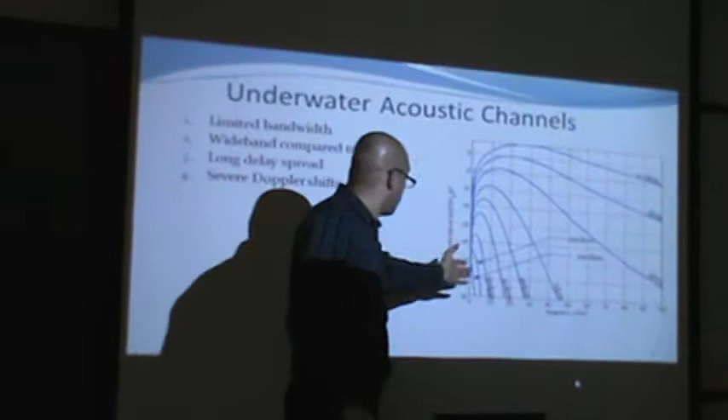It could be, say, more than 100 kilohertz if the distance is less than 1 kilometer, but then the usable bandwidth will shrink down to only a few kilohertz when we're looking at distances of 10 kilometers or more. This bandwidth, although very limited, when compared to the carrier frequency, is very wideband. What that means is that the properties of the channel at the lower frequencies could be quite different than what it is at the higher frequencies.

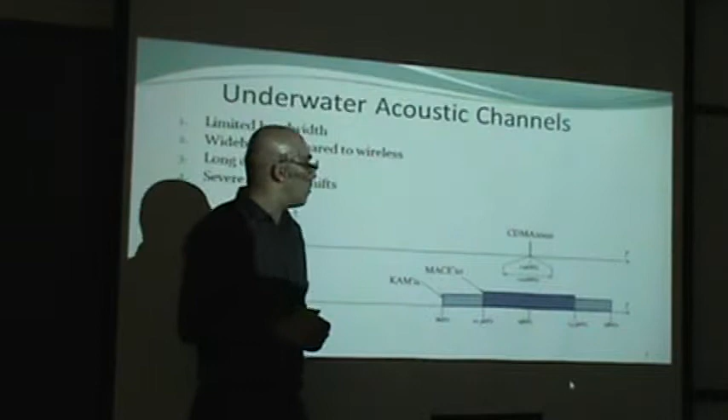This is in contrast to the wireless world where, for example, the 3G signal, although it has 1.25 megahertz of bandwidth, when compared to the carrier frequency, is a very narrowband signal. So we expect all of the channel to follow the same statistics.

Another property of acoustic channels is the long delay spread. As you see here, this is an ensemble of measured channel impulse responses from an experiment conducted in the ocean. This figure shows that the delay spread for this specific channel, which is typically a rather short one, spans more than 3 milliseconds.

That means if we want to be operating in single carrier mode, and say we're looking at symbol rates of 10 kilosymbols per second, we need an equalizer with 30 taps. Quite complex. Another thing that we see in this figure is that all these channel ensembles are measured during a duration of only 6 seconds. So this channel is very quickly varying, where in 6 seconds the channel has changed dramatically.

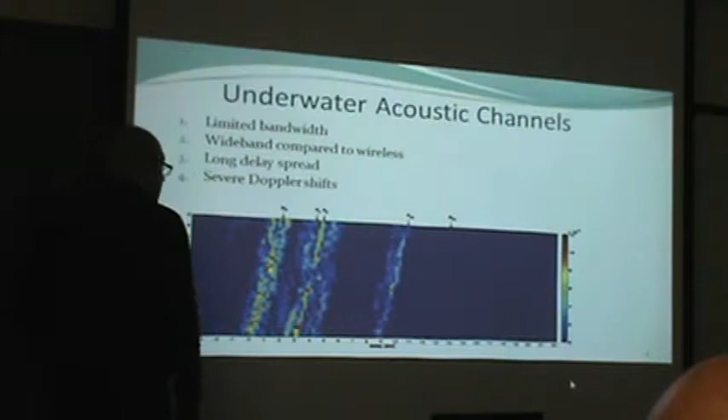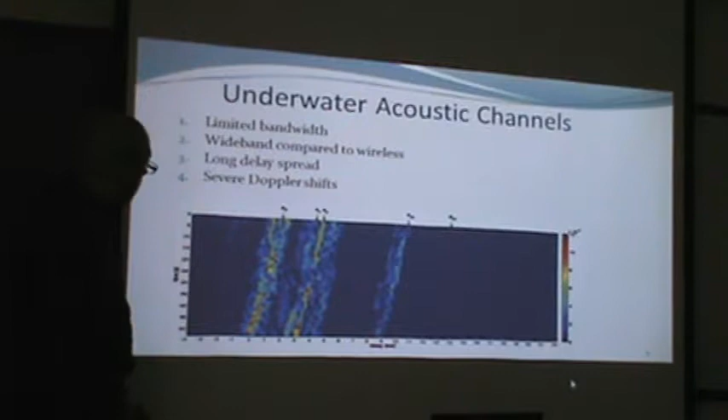If the channel is varying so quickly, it means we have severe Doppler shifts. This is a figure showing how this channel could vary both in amplitude and in phase. This is the channel impulse response as it varies over time. So both amplitude and phase of the channel taps do change.

That long delay spread that we just saw speaks strongly in favor of applying OFDM signals over this channel, because it would help us get rid of that long equalizer that was needed. However, OFDM signals in this channel have challenges other than the ones in the wireless world. In the wireless world, what we typically do is use one OFDM block to estimate the channel. Then that channel estimate is valid for the next few OFDM blocks.

This is not true for the underwater channel. The channel is going to vary so quickly that we need to estimate the channel for every OFDM block, or at least have some means of tracking the channel from one OFDM block to the next in decision-directed mode. That's a complicated job to do.

This is where perhaps another property of OFDM helps us out, which is, it makes differentially coherent detection feasible. If you wanted to do it in single carrier mode, having that long equalizer combined with differentially coherent detection is not going to work. Whereas with OFDM signals, we will see that it will work out pretty well.

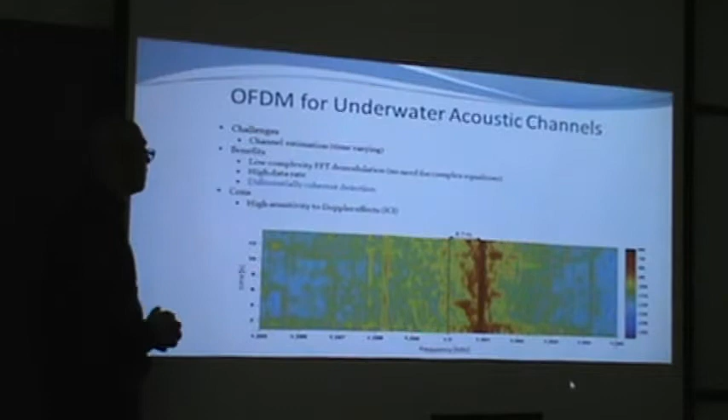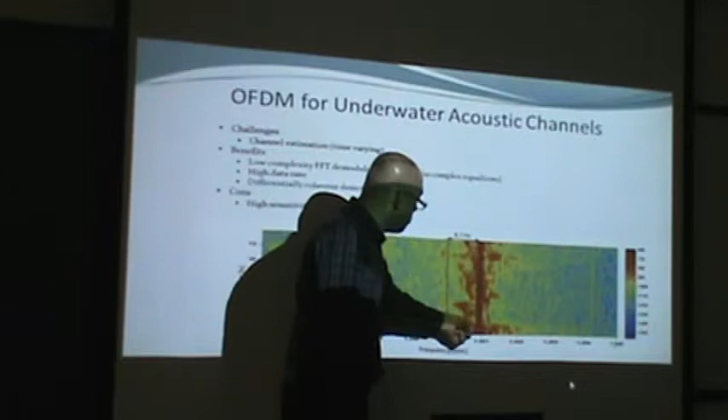By the way, the plot here shows the spectrum of the signal. When we transmit a 13 kilohertz tone, the received signal here shows an 8.7 hertz shift due to the motion, and you see some Doppler spread around that. So instead of receiving a tone at 13 kilohertz, we are receiving a tone with some spread due to motion.

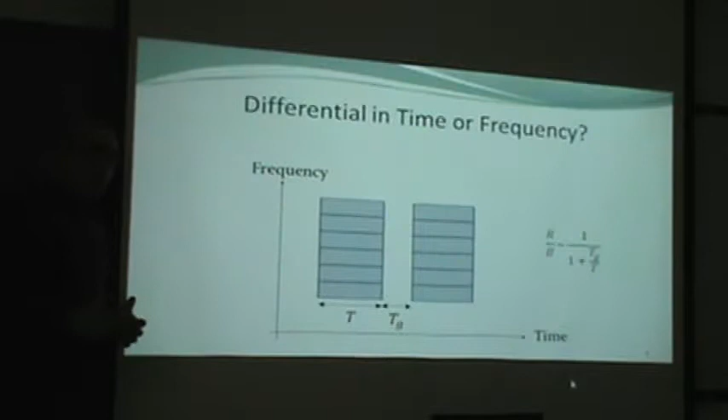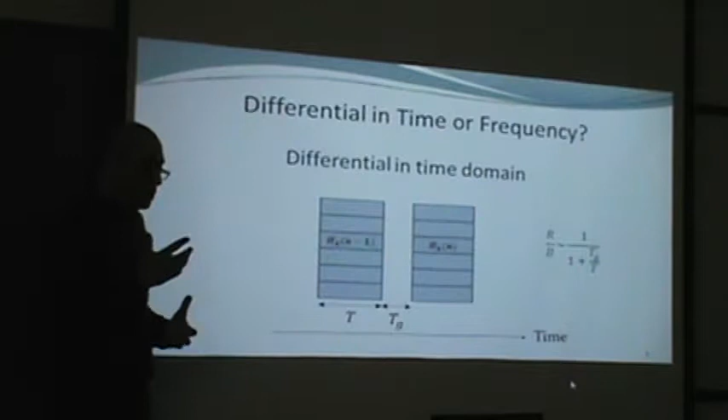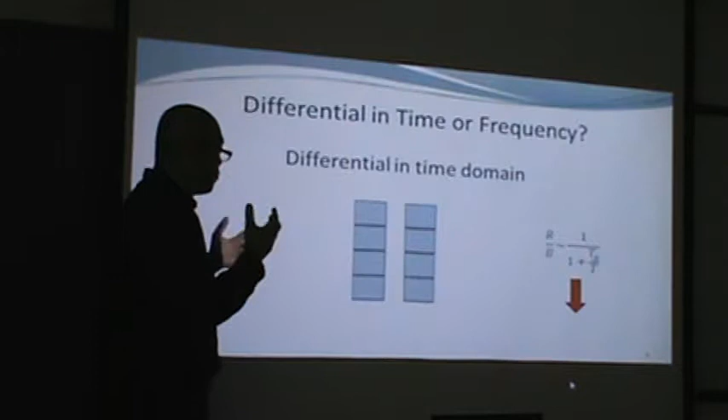If we want to do differentially coherent detection with OFDM, we have two choices. One is to do it in time domain. If you want to do so, we are going to be comparing two adjacent OFDM blocks. And if you want good performance, we need more coherence between two adjacent blocks, which means we would be looking to have shorter OFDM blocks. The problem? The guard interval. Because of that guard interval, shorter OFDM blocks means lower rates.

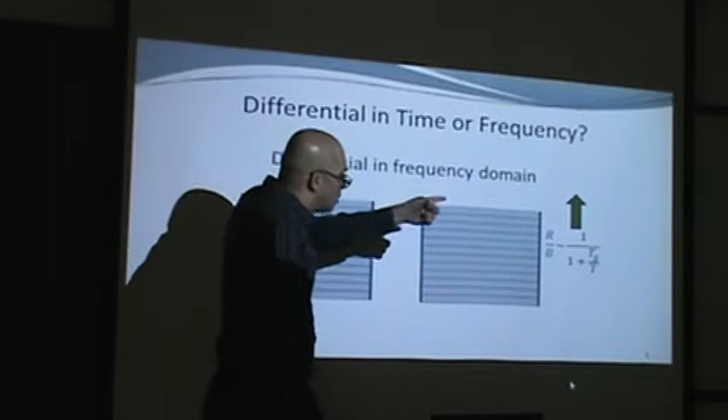Therefore, we look into another form, which is in frequency domain. In this case, we compare two adjacent carriers. To increase the coherence between them, we need to pack more carriers into the OFDM block, making the OFDM block longer. The rate will go up. Therefore, we do differentially coherent detection in frequency domain to pack as many carriers as possible into the OFDM block. But then the question arises on how many carriers can be fit into the OFDM block?

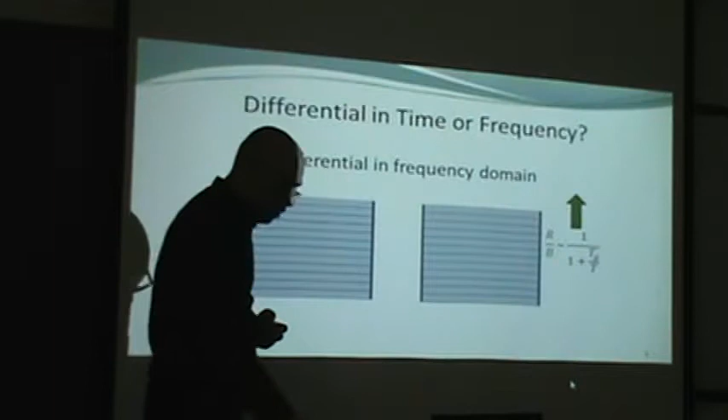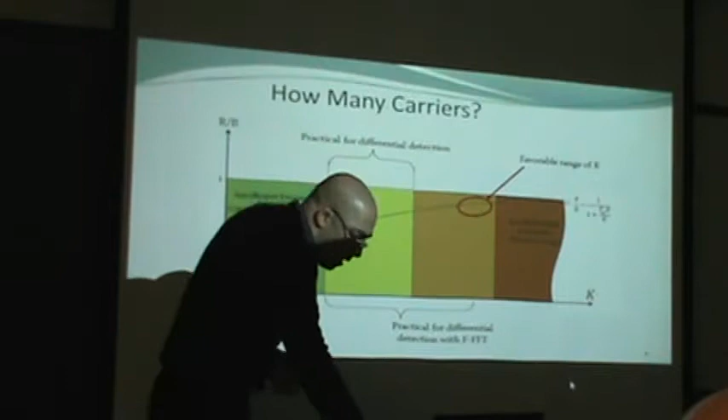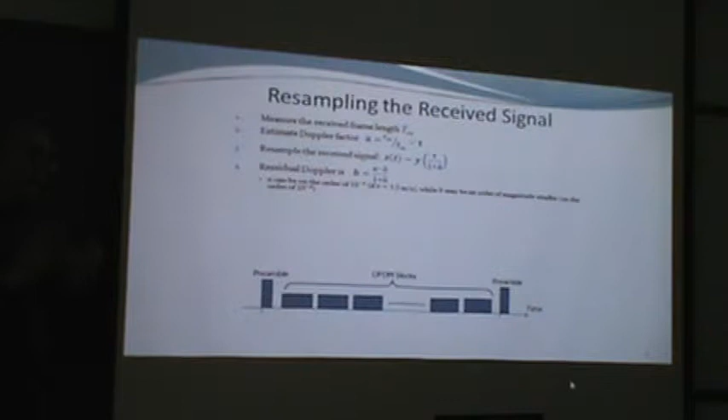But one of the methods that we use for compensating Doppler is similar to what they do in the wireless world, where they model the Doppler as a frequency offset and they treat it just like a frequency offset and remove it. However, in our case, the problem is a little bit different because the Doppler shift at lower frequency carriers could be quite different than the Doppler shift at the higher frequency carriers. Therefore, a better method of fighting it is to resample.

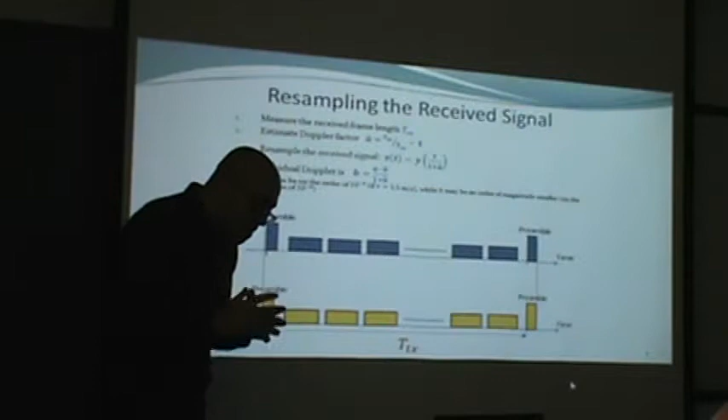To do so, we measure the length of the frame at the receiver using the preambles at the beginning and end of the frame of OFDM blocks. Then we compare that to the original transmitted frame length and we resample the signal so that the length matches that of the transmitted frame. What we observed in experimental results is that this resampling removes the bulk of the Doppler shift, but we will still have some residual Doppler, which will cause inter-carrier interference.

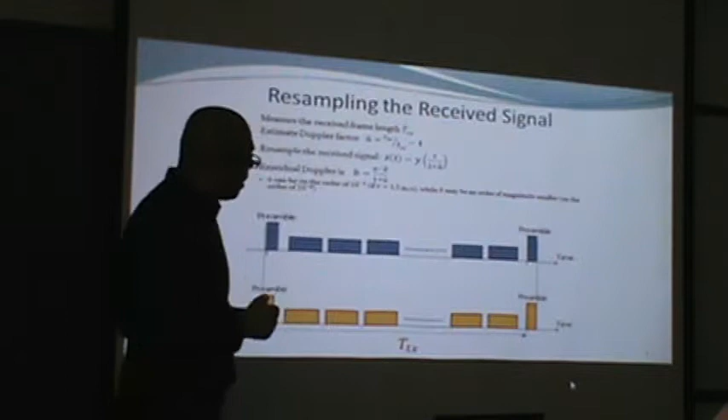But before I go on to how we deal with the residual Doppler, let me talk about differentially coherent detection. When we do that in frequency domain, we use the assumption that the channel does not vary between two adjacent carriers. If that assumption holds true, differentially coherent detection follows simply as division of the output of the FFT at two adjacent carriers. While that division works, perhaps a more interesting representation is multiplying by the conjugate of the neighbor, because now we have that factor of the channel coefficient amplitude sitting beside our symbol.

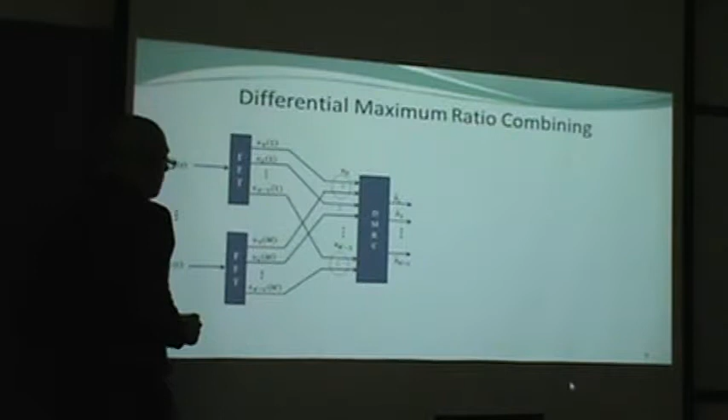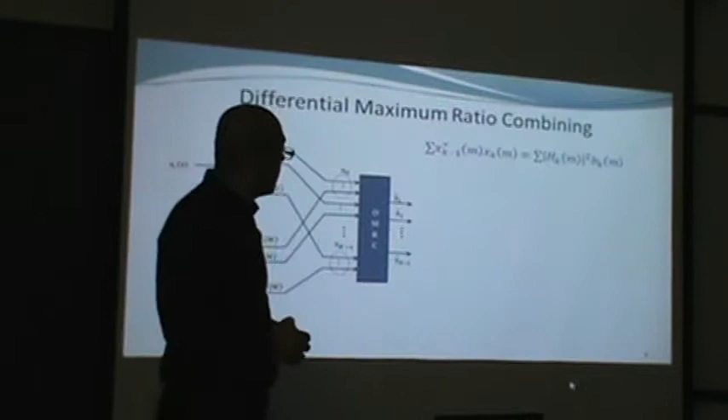This is very helpful when we want to think of an array of receivers. In this case, all we need to do is sum those variables up, and the result very much resembles maximum ratio combining. This could also be represented in vector form, where differentially coherent detection can be followed as easily as that.

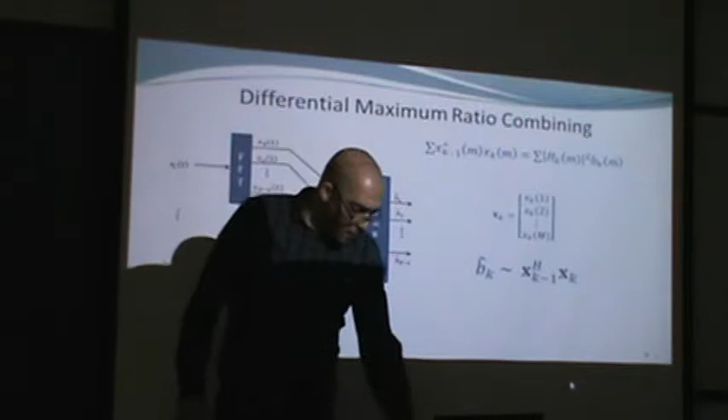But let us go back to the issue of the Doppler now. To deal with the residual Doppler, the most common approach that exists in the literature is equalization. Though I should remind you, this equalization is quite different than the one that we taught in the introduction. That was an equalizer with 30 taps, it was in time domain, it was very complex. This one, in most cases, you can get away with only 3 taps, and it operates over carriers.

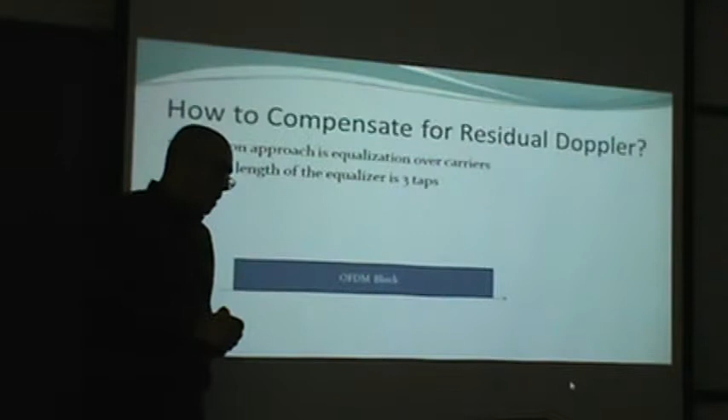So basically what it aims to do is to remove the ICI due to that residual Doppler that we could not resolve with resampling. The issue with it is the performance. When the Doppler shift is large, that equalizer is not sufficient.

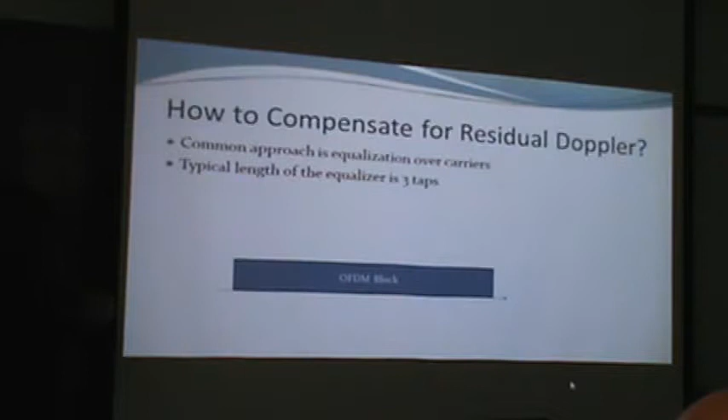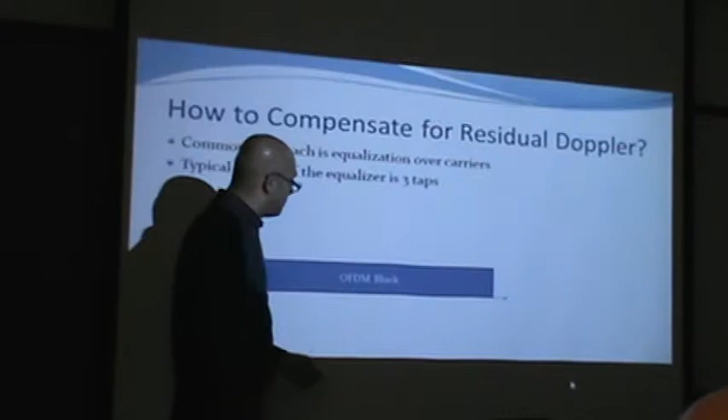What we do is based on a different vision on Doppler shift. One way to look at Doppler shift is that whatever frequency we transmit, we receive the signal at a different frequency. Here's the Doppler shift. But another way of looking at it is that this channel is varying over time, so that the channel that we see at the beginning of the OFDM block is quite different than what channel we see at the end of the OFDM block.

If we look at Doppler like that, one idea is that if the channel is time varying over the OFDM block, violating the orthogonality requirement of OFDM, we cut the OFDM block into 2 segments. Then if we give each of these segments to a different FFT, and combine the 2 outputs of the FFTs with the correct weights, we can compensate for the channel variation from segment 1 to segment 2, therefore reducing ICI.

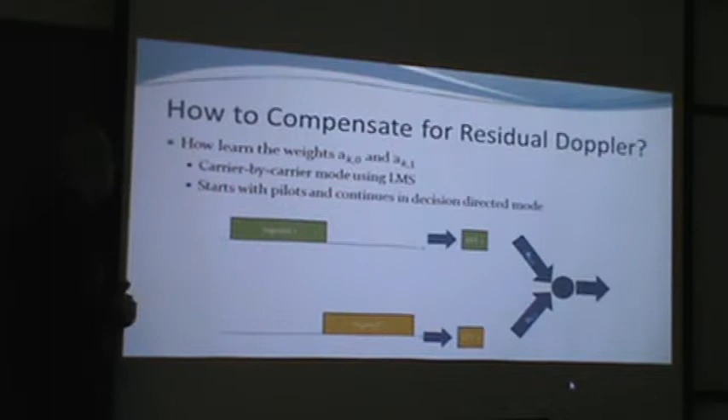A valid question is, how are we going to learn these weights? The method that we use and works reasonably successfully is to learn those weights in carrier by carrier mode using a very low complexity LMS algorithm. The algorithm starts with these few pilots and then goes on in decision-directed mode.

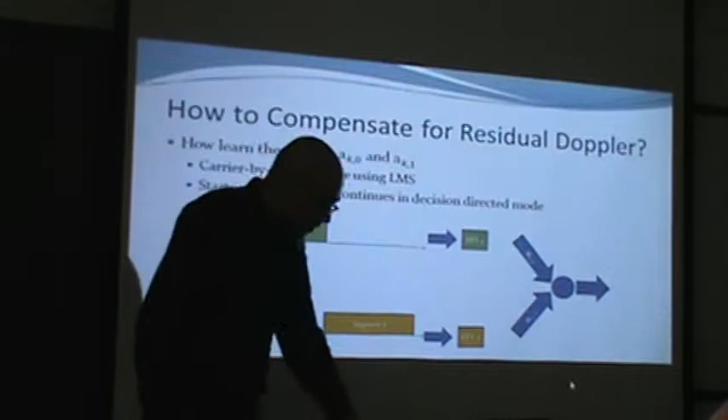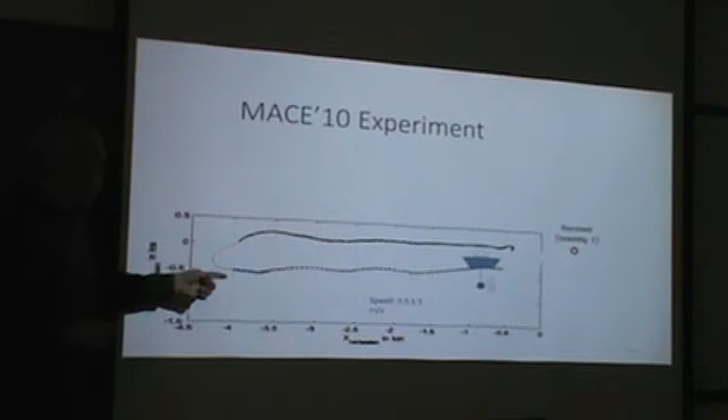To put this into a test, we use the results from an experiment. In this experiment, which is conducted in the ocean, we have the transmitter being towed with the ship, and we have an array of 12 receiver elements anchored to the seabed. The way the experiment works is that the ship starts towing the transmitter away from the receiver. The motion causes a great deal of Doppler. Then the ship turns around and moves towards the receiver. Every 4 minutes, the ship transmits 1 frame of OFDM blocks, represented here by 1 dot. So each dot is 1 frame of OFDM blocks being transmitted.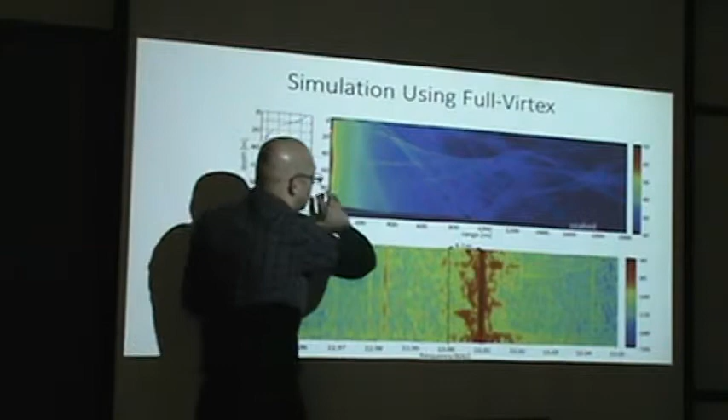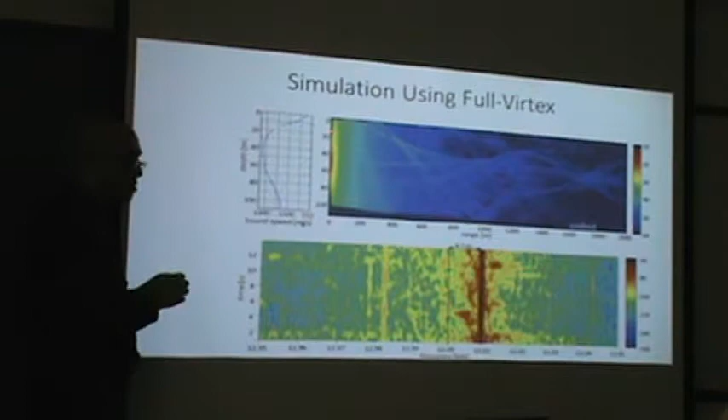And before I go to the results, this is one of the interesting figures that I thought I'd like to show you. This is a simulation based on the channel parameters measured during that experiment. Specifically, it's the sound speed profile. In this case, the sound speed profile is such that in the mid-water column, we have the minimum propagation speed. The effect of that is, as you see in the figure of acoustic intensity over a distance of 2 kilometers, that sound speed profile bends the waves towards the middle. In some means similar to what happens in the optical fiber, where the waves bend towards the slower propagating region of the medium.

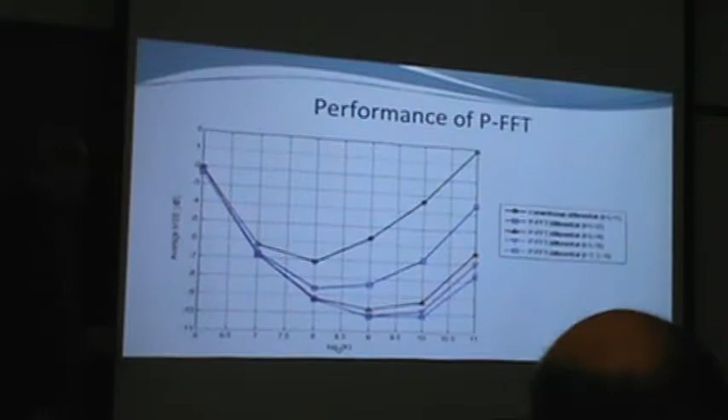So let me show you the average mean square error performance. On the x-axis we have the log of number of carriers. As discussed before, if we have too few carriers, 128 carriers for example, 64 carriers, there's not enough coherence between carriers to follow on with the differentially coherent detection phase. The black curve here shows the ordinary differential detection. As we pack more carriers into the OFDM block, we are reducing the carrier spacing. We're being more vulnerable to Doppler. Anywhere beyond 256 carriers in this case, ICI will limit the performance and detection will fail.

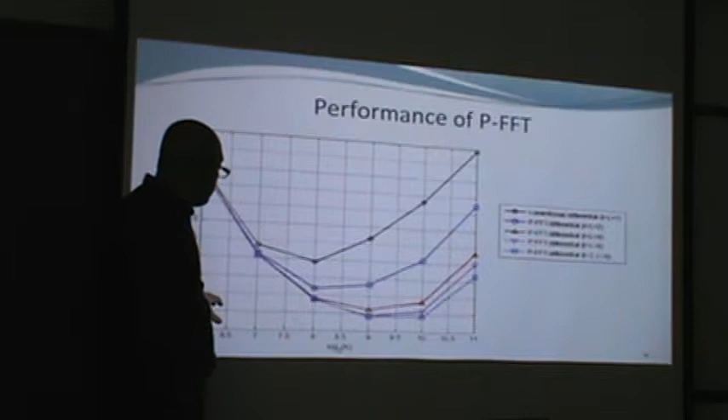This is where our multi-FFT algorithm, in this case we call it PFFT, kicks in. If we cut the OFDM block into 2 segments, we can improve the performance by about 3 dB. We can cut it down into 4 segments, the red curve, improve the performance even further. Even we can use 8 segments. With this method, what we can achieve is that we can increase the number of carriers 4-fold and improve the performance by about 3 dB.

We also have other methods of doing the multi-FFT demodulation. As you see, a bunch of curves. All methods pretty much perform similarly. They by far outperform ordinary differentially coherent detection. And that can also be compared to coherent detection.

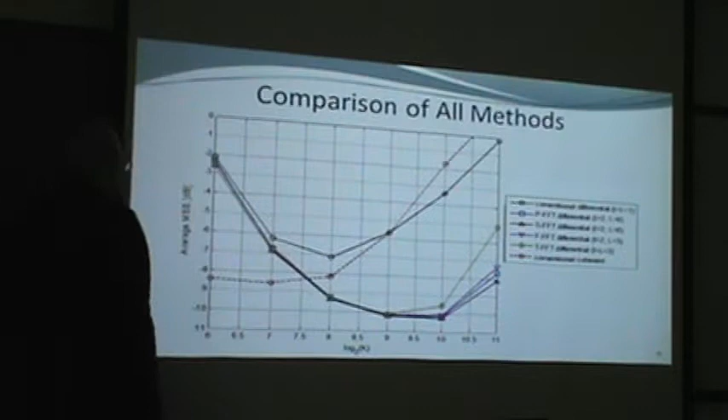This specific coherent detection algorithm is one that works by tracking the channel. It works in decision-directed mode, and if we have anywhere more than 256 carriers, it cannot track the channel from one OFDM block to the next. So it eventually loses track of the channel and it will fail. Even equalization cannot save it.

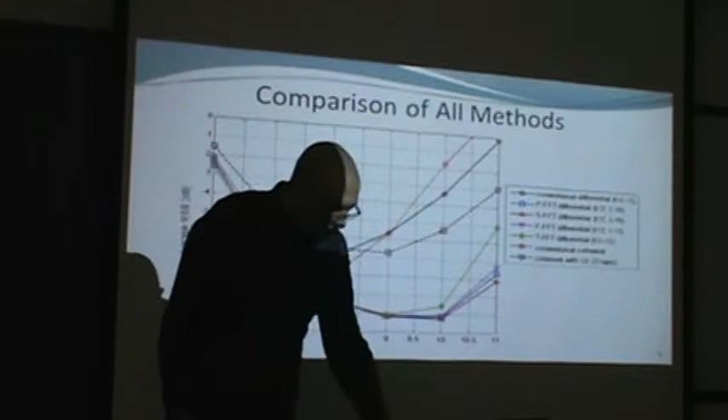So, in conclusion, we suggest application of differentially coherent detection to achieve better rates by removing the pilots, increasing the bandwidth by applying OFDM, and we see that we can actually outperform coherent detection in this specific channel due to the challenges of channel estimation. So, with differentially coherent detection together with multi-FFT demodulation, we can achieve better rates and better performance at the same time.

A few other projects that our team is currently working on are sparse channel estimation on underwater acoustic channels. Another one is live video transmission that we will have a demo on today. Statistical modeling of the channel: no widely accepted statistical channel models exist for underwater channels. Underwater acoustic and underwater sensor networks, and rateless coding.

So let me move on to the demo. In this demo we have a transmitter, the amplifier, external sound card, and a very simple speaker. At the receiver side we have the external sound card again, the microphone, and this laptop will operate as the receiver. And the reason that we use external sound cards is solely because of their better signal to noise ratio performance and the extended bandwidth.

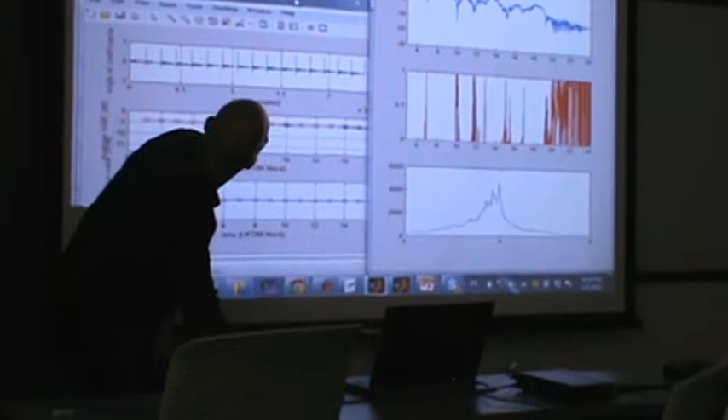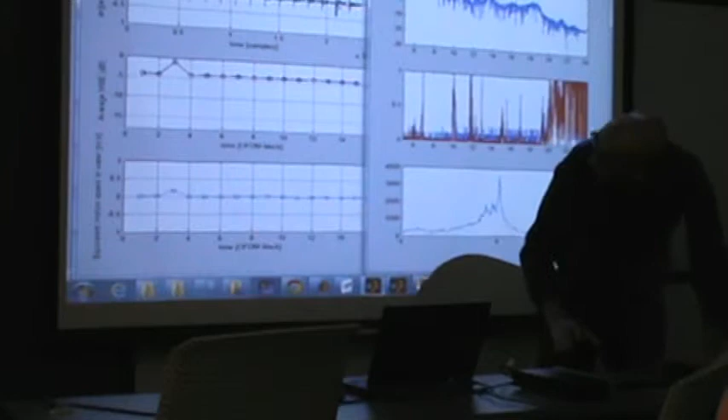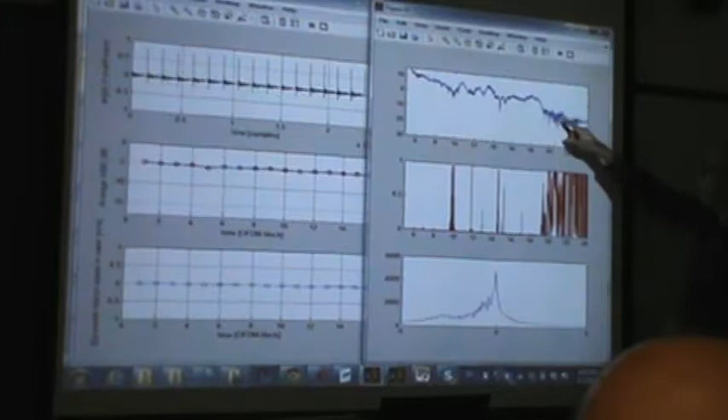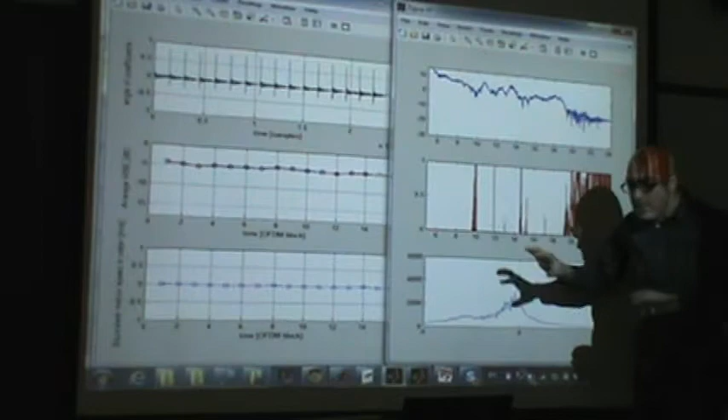So what we have here is, let me pull this closer. So that's what you have. There is a setting issue with the device that I will solve. This is the amplitude of the channel impulse response. This is the amplitude of the channel response in frequency domain. Due to an issue that I think I can solve, beyond 20 kilohertz is being cut. We will fix that. This is showing the average BER over frequency domain.

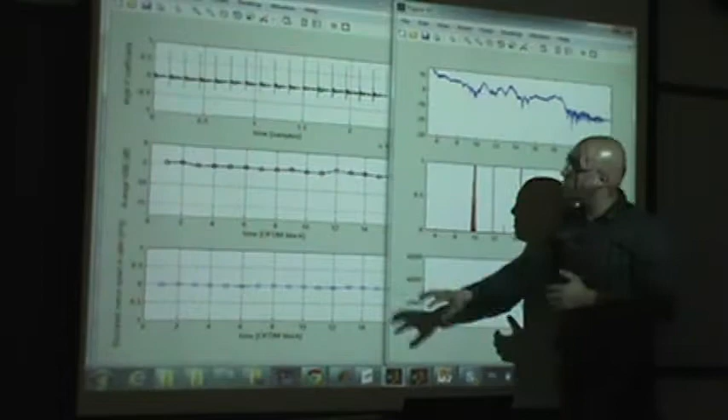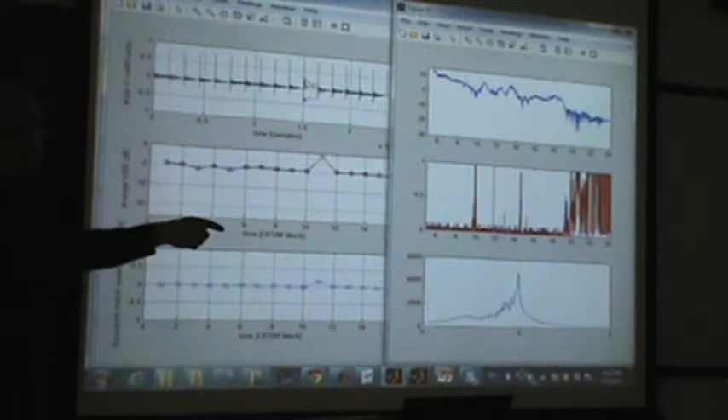So when you see nulls, you just have elevated error on those carriers. This is the channel impulse response. And on this side, this one shows those combiner weights that we talked about. And specifically, I will move the transmitter, and you'll see how it affects the combiner weights. In this figure, the red and blue, just a second, I'm not using the external sound card here.

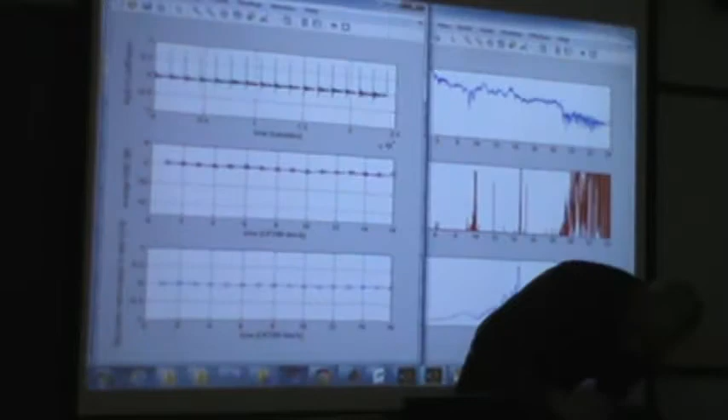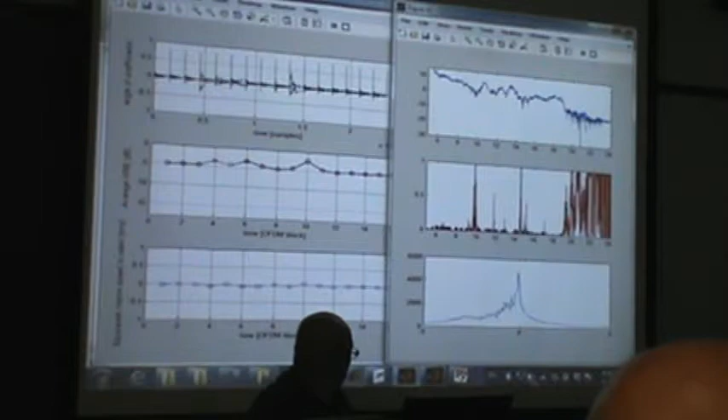We are not using this. There we go. We are working with the laptop microphone. That's why all the bandwidth was being cut. Let me start MATLAB real quick, on that device this time.

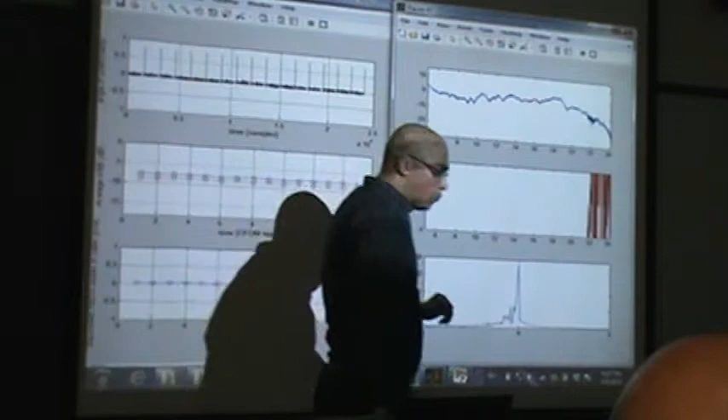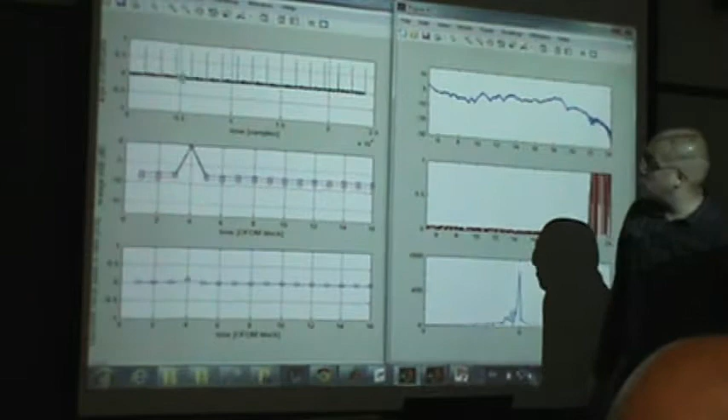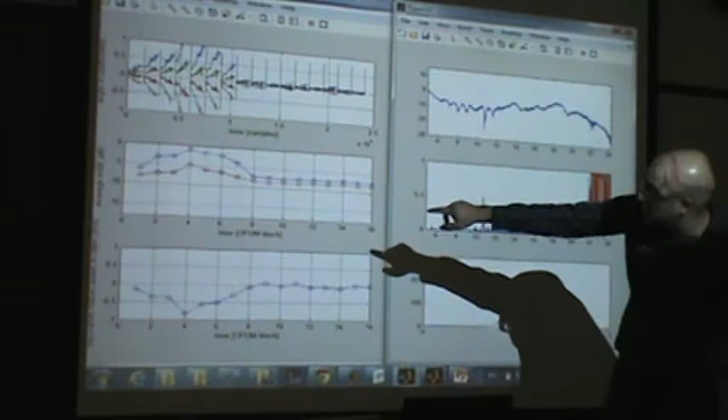So now I will move the transmitter, introduce a little bit of Doppler into the channel. The red curve is the MSE value for our method. The blue one is ordinary differentially coherent detection. And in this figure, we're showing the Doppler shift. So the combiner weights change. We detect the Doppler, and as you see, we compensated the effect of Doppler there, and the other way around.

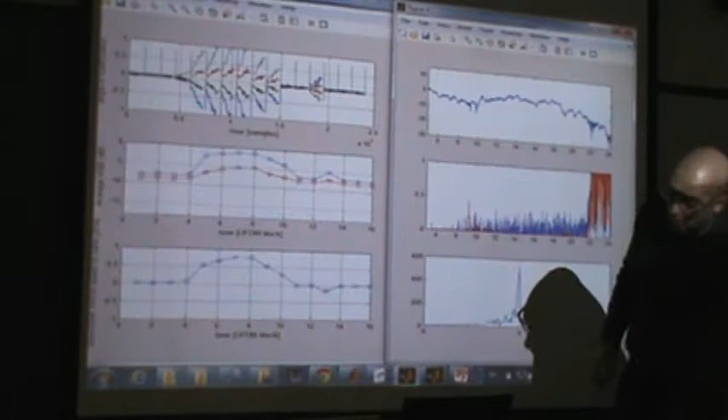Getting closer, again you see the difference grows, and a similar effect you see here. The blue is the ordinary detection, the BER rises, while with the red, it is compensated. Another thing that I wanted to show was a very simple code.

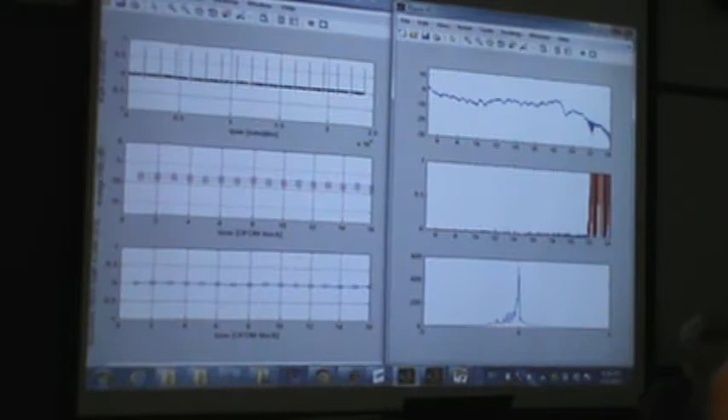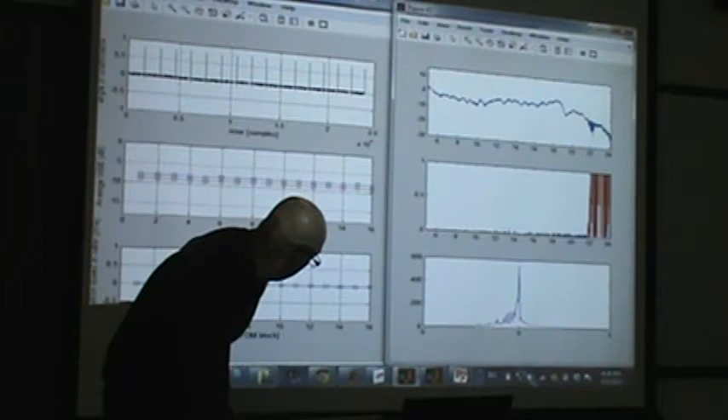Do we have any time left? If you want to have questions, you should stop. Sorry, 4:27 already. So. Any questions?

You may have said this, but... Good question. It is a means of using more than one carrier in parallel. But specifically in the OFDM case, you set the carrier spacing so that... What do the letters stand for? Orthogonal frequency...